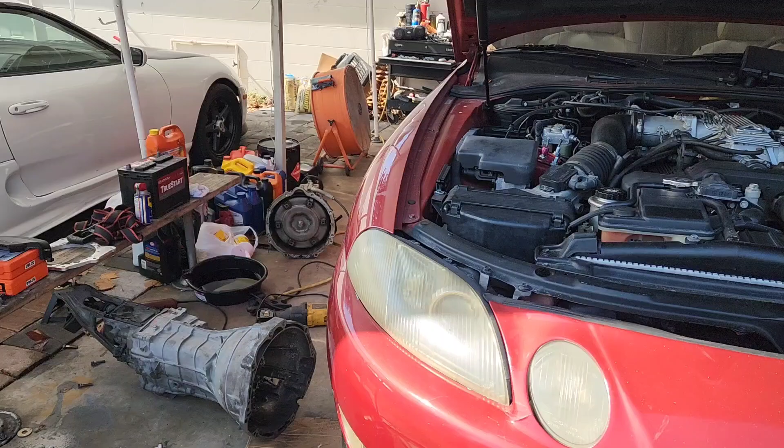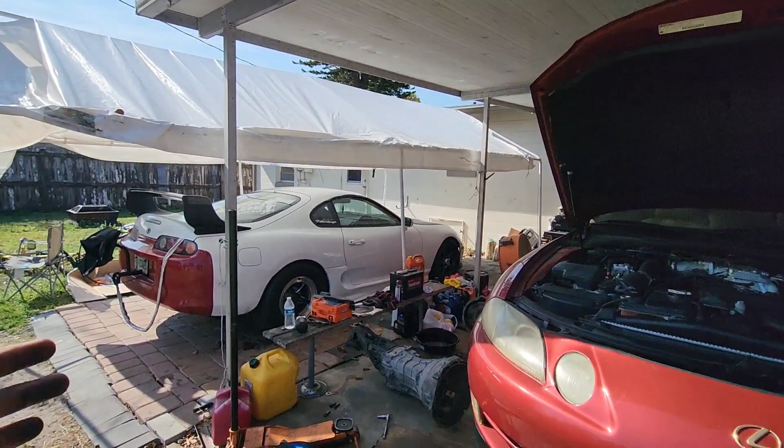Today we got a 1UZ SC400 that we're gonna do a manual swap. Now my brother already started, took down the old automatic transmission, and we're gonna put this CD009. The kit is from Automotive Sports Engineer, something like that, and it's gonna be a CD009 6-speed

into this 1UZ. First thing you gotta do is you gotta cut the bell housing on that third line.

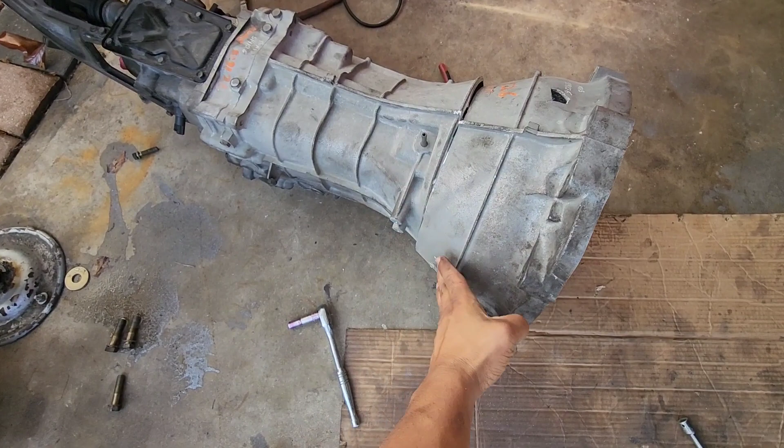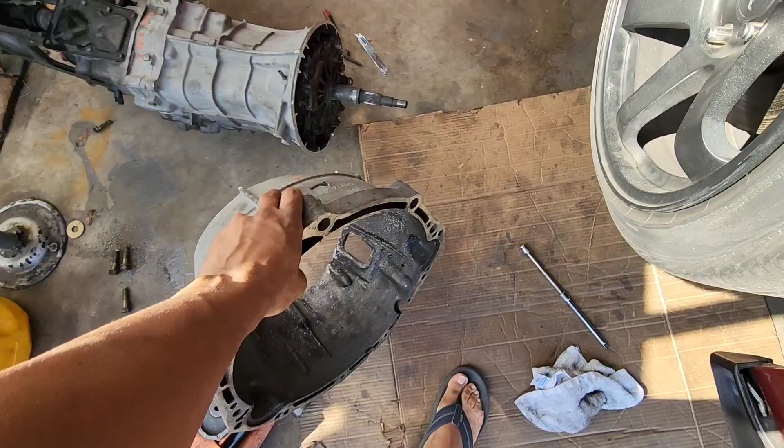But since we're top secret and we have this sharp hand, we just grab it right there and we go like this, yeah! And you see how we just cut it? We just hit it with the hand and we just cut it straight. I learned that with many years of practice. Takes a lot of bell housings. I cracked them here. My brother tried it and he broke the bell housing as soon as he hit it. But like I said, he's learning. But I hit it perfect and I just cut it and it comes right off. Okay, so look, I have no damage to the hand whatsoever.

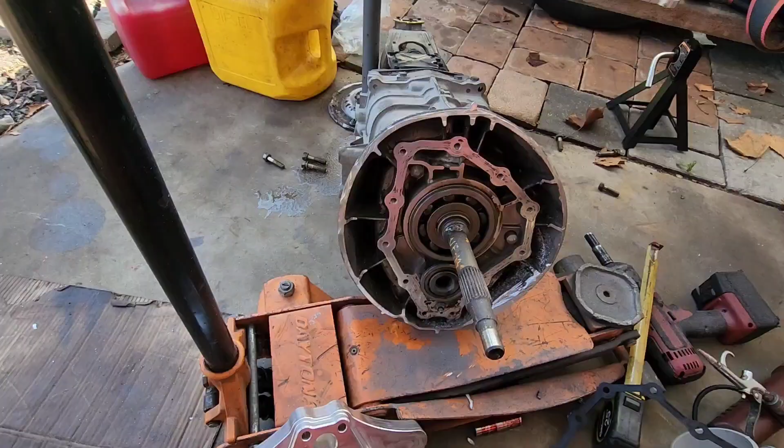So now the next thing we're gonna do is we're gonna take this plate out and then we're gonna put the adapter plate here. Then we're gonna use that bell housing over there and we're gonna put it here. All right, so we removed the old front cover plate. This is the gasket. We cleaned it, right? We also cleaned all the surface around with brake cleaner, and gotta put Loctite on these 4 bottom bolts.

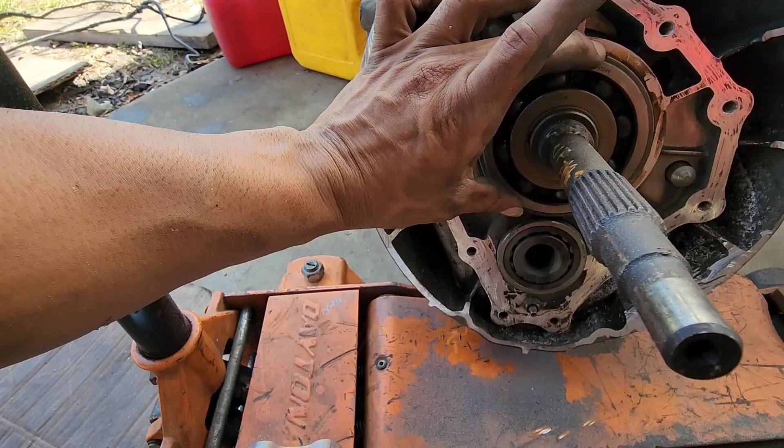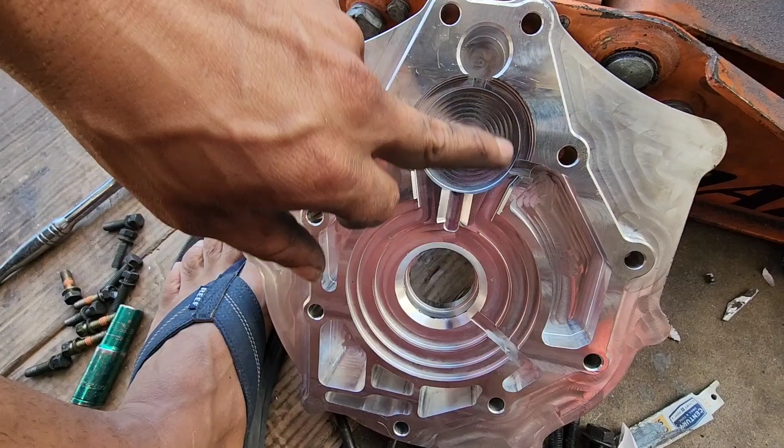Also take the measurement of this ring. Make sure it's 100 millimeters. This thing comes with a sticker in the front, which we peeled right there. Tells you if it's smaller to call them. But we took the measurement and everything is within spec. So now we're just gonna put a little bit of silicone around, real thin.

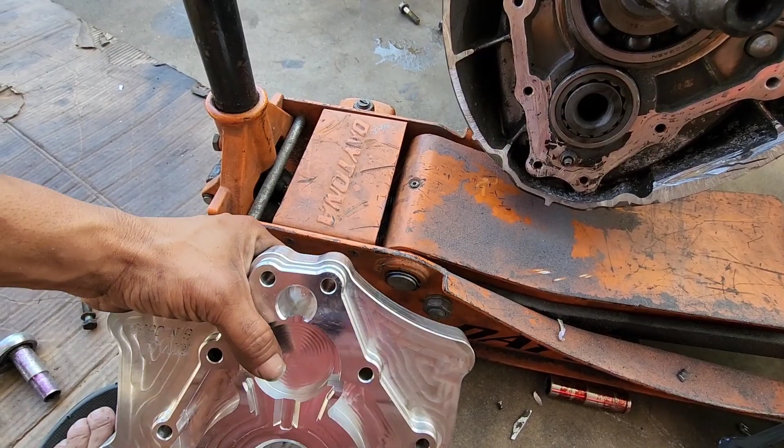Put back the stock gasket, put a little bit of Loctite on these 4 bolts, and we're gonna torque these bolts, which is pretty cool because the plate tells you right here the plate gets torqued at 30 and the bell housing gets torqued at 40 pound-feet. So let's do it. So this is the gasket. I already put silicone on the inside and I put some silicone around the plate and I'm about to put it there. The kit comes with all the hardware, right?

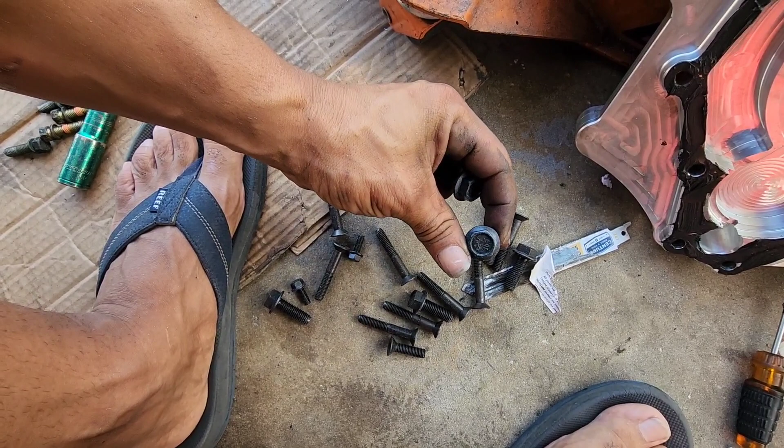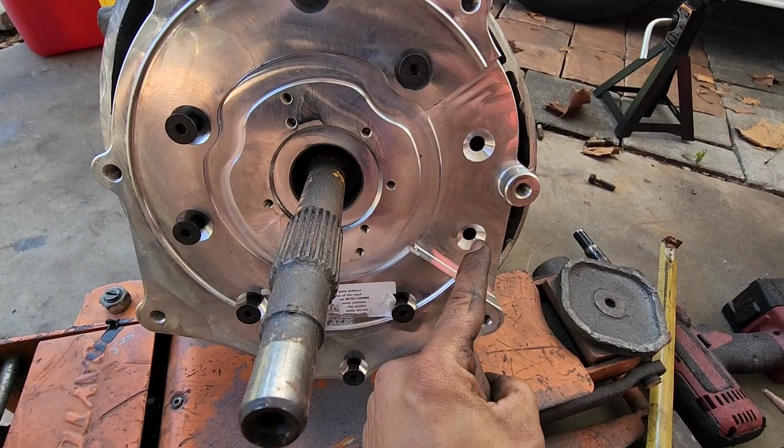The ones that are like this are for the bell housing, and these other ones right here are for the plate. There are some longer and some shorter, and I'll show you shortly where the short ones and the long ones go. So all these ones right here are long, and these 2 are for these ones right here. And then this is the last one, that's 30. So all have been torqued to 30, and the way we did it is we kind of crisscrossed everything, and they have been torqued to 30 pound-feet.

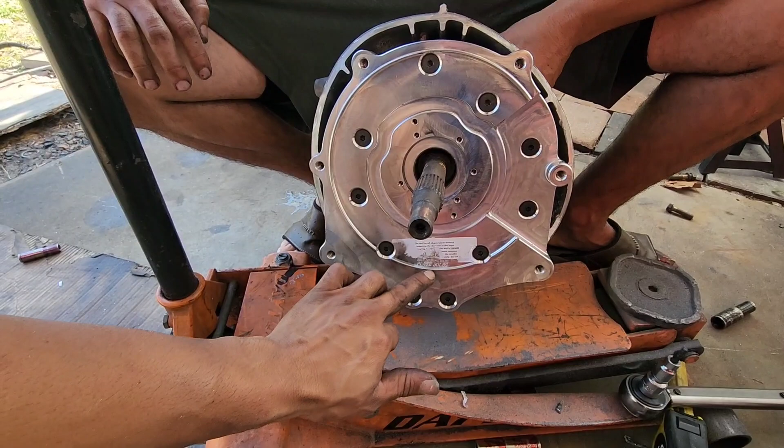So now we're gonna take that bell housing off from there, put it in here with these bolts right here. These 2 little ones are for the slave cylinder that we're gonna be putting last. So this ring that it's got here, that's where this sits. So it basically centers it. You'll see now. And then this gap that's here, that's where the lines come out, one for the feed and

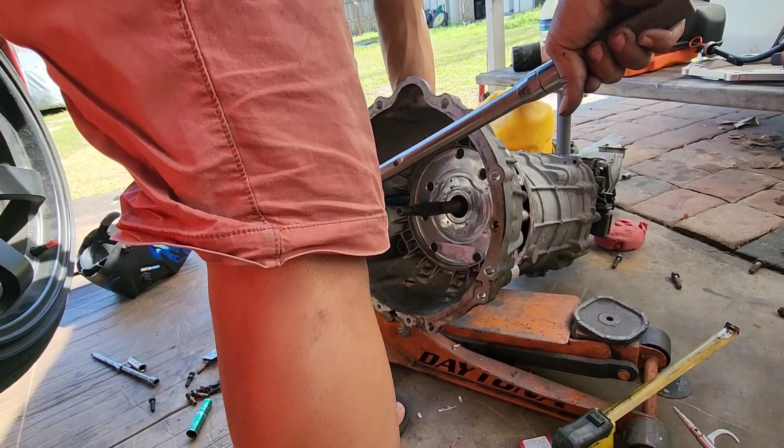one for the bleeder. The 2 long ones go in the bottom, and all the shorter ones, all 4, go on the top. So this one goes to 40 pound-feet. That's it.

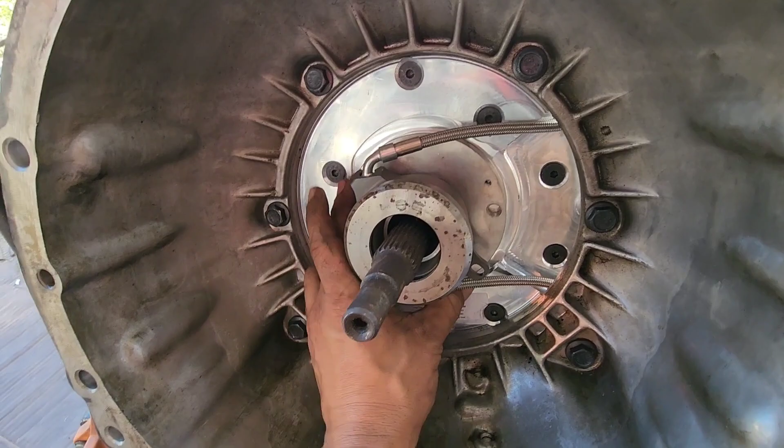So we put the slave in. This is a Tilton. The way this one works, you have to shim it, right? So since it's already put in there, you can spin it with this. So just spin the inside, and it's got some grooves, and it just pulls it in and out. So I can't find my caliper. My brother went to buy a new caliper. That way we can shim this.

So this is the old seal. That's the new seal. Always change that seal, because why not?

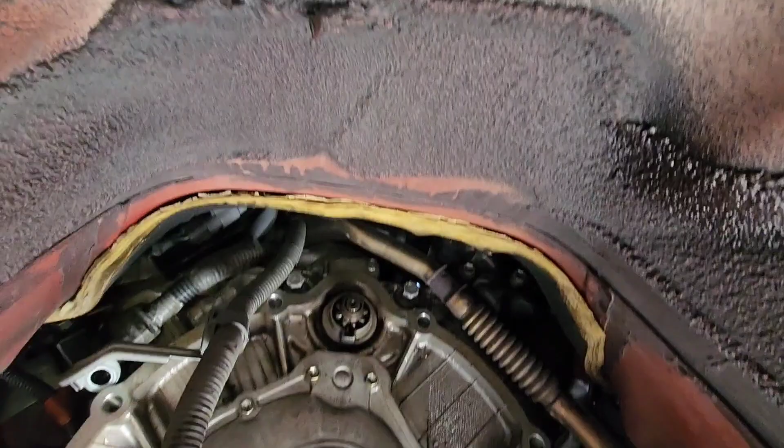And this is why I hate this. That freaking starter. That's why I hate this one, you see. Only because of the starter. If the starter wasn't there, I wouldn't mind. But bro, to change that starter, you take out so much stuff, that I would rather just sell the car if I have to change the starter.

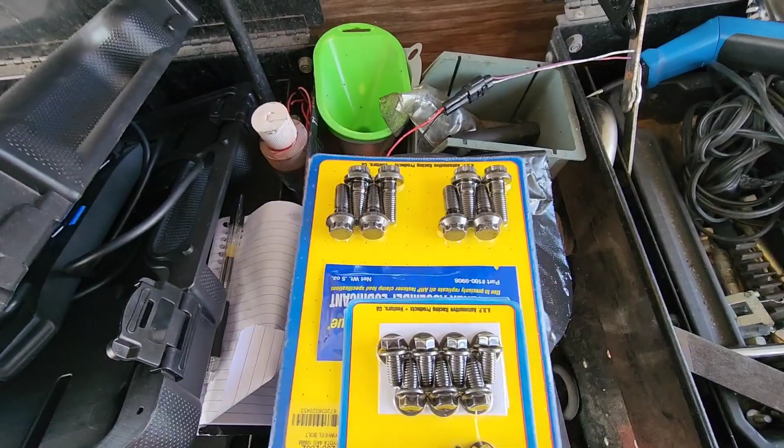It's got the flywheel bolts here, these ARPs, right? And then these other ones are for the pressure plate to the actual flywheel. So it's a pretty common process.

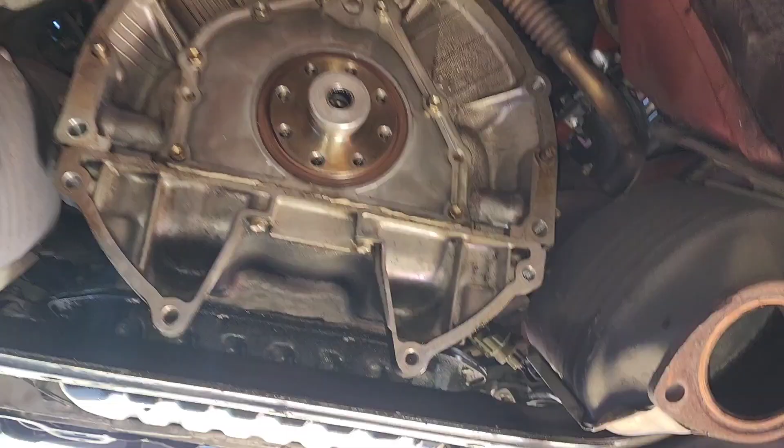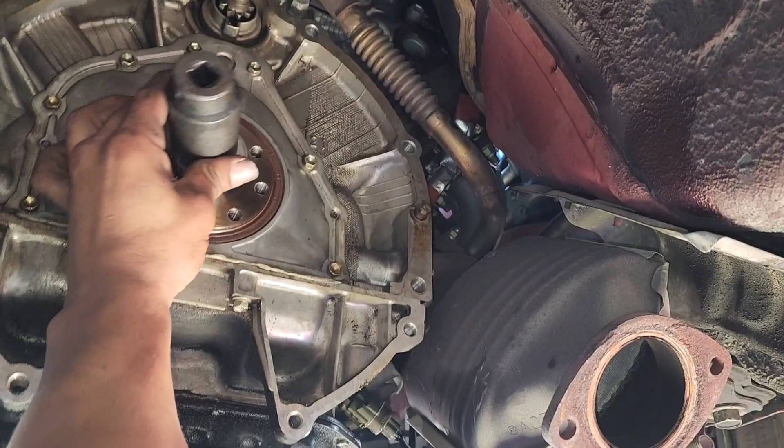When you put this in, please don't hit this with a hammer. Get a socket, something big enough like that, and then put it in like that, because if you hit it, you're gonna damage this bearing that's here. Get a big socket and hit it until you hear the sound change, going from hollow to real solid, okay? And it's all the way in.

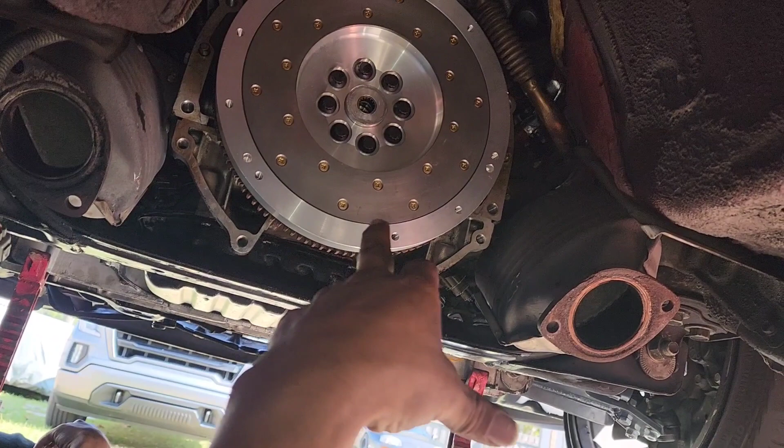So we just pulled it in. We torqued this to 80 pound-feet. We did 40 crisscross, and then we did 80 crisscross, and this is good right now. So now we're gonna bring the pressure plate along with the alignment tool and bolt it in there. Oh, and remember also put Loctite, red Loctite here, so this doesn't come out. We have ours right there.

So we put in the clutch, flywheel. It's already installed. We put the clutch disc in with the springs towards the tranny, and now we have to bolt up the pressure plate. Don't forget to put these pins in here. Comes with a little Loctite thread lock. Oh, nice. And then you put them in with the fat part in, the thin part out, and that's how you align your clutch. And this is how everything looks once it's torqued down.

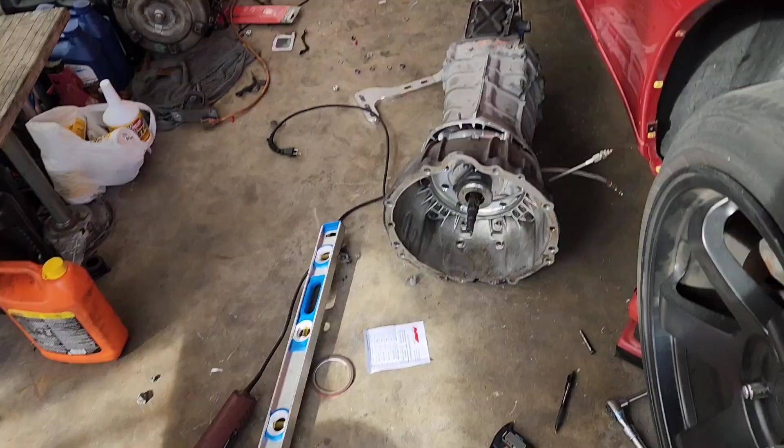Beautiful. All right, so we did a little bit of progress. What I did is I cut this right here. I cut this too right here, right? Because I want to make sure it doesn't touch over there. I cut this part here too. I'm gonna make sure it doesn't touch over there.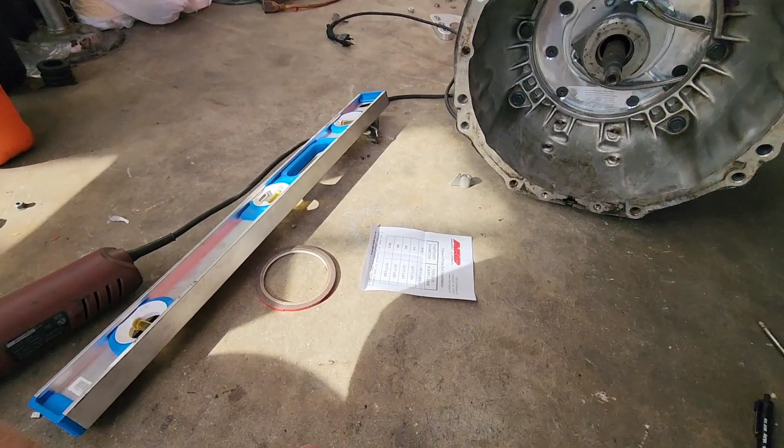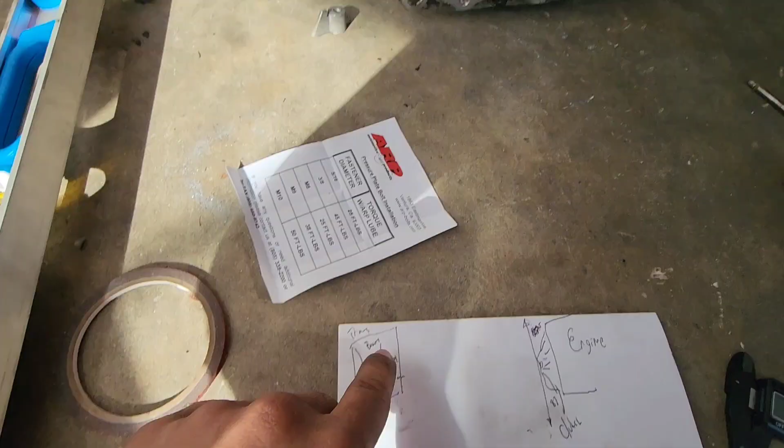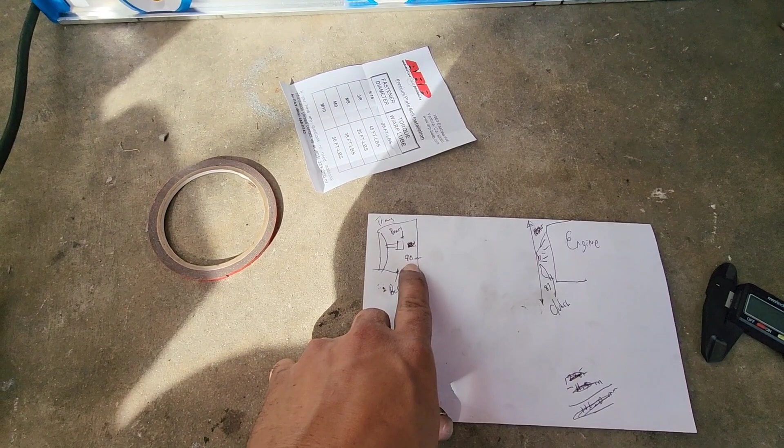Now over here in the front, what I did is I shimmed it, because this T56 slave, you can pull this forward and backwards, like towards the engine or towards the transmission. So don't make fun of my little drawings, right? But these are my drawings. So this is a bell housing, this is the slave, which is this right here, right? And what I did is I put this in here, zeroed the caliper in here, so I don't add this part here, and I got the measurement from this edge to here. That gave me 90 millimeters, right? This is what I got going on right now. This is after I've shimmed it, okay?

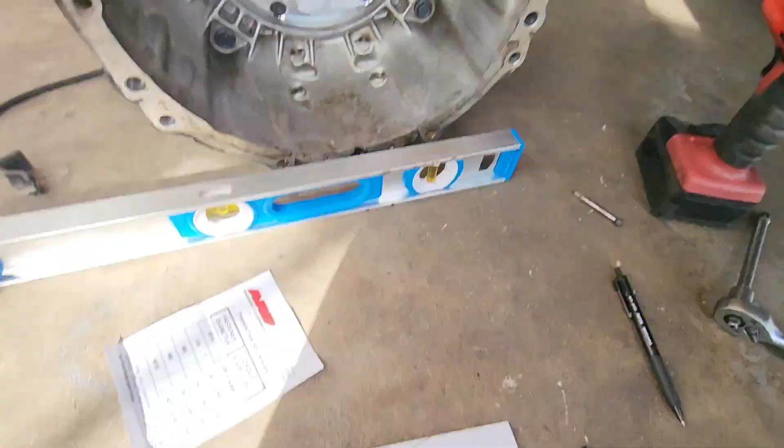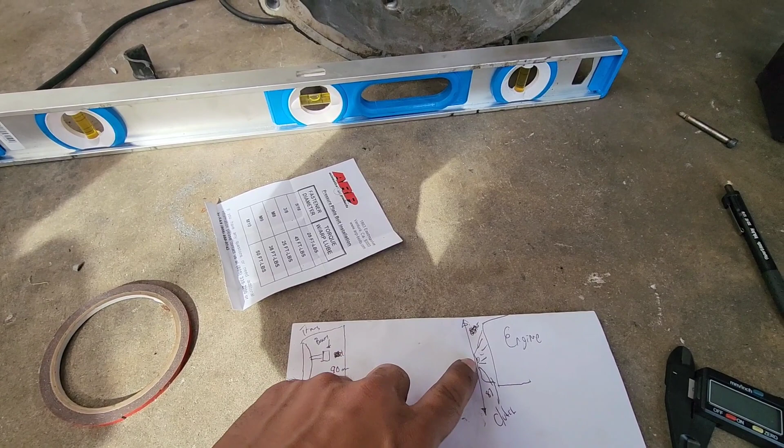What you want to do first is get the measurement over there. So this is the engine block right here. This is where the bell housing sits. This is the clutch. And you need the measurement where this bearing sits on the clutch. So you get that measurement from where it sits on the clutch, from here, to where the bell housing sits. So the same thing here, but where the clutch sits, right? That gave me 87. So that was my starting number, 87.

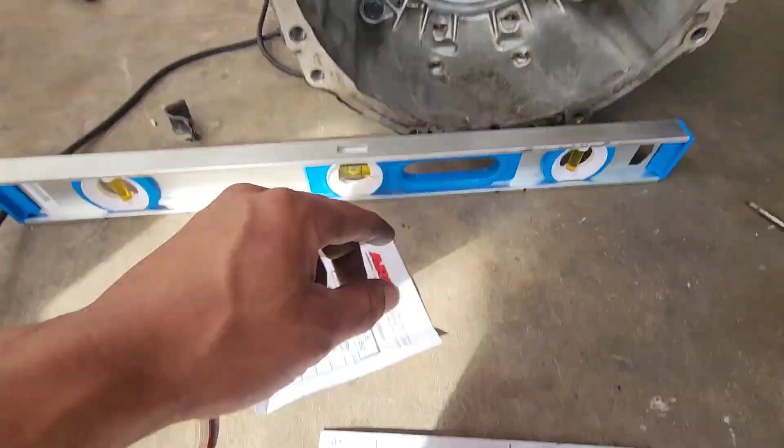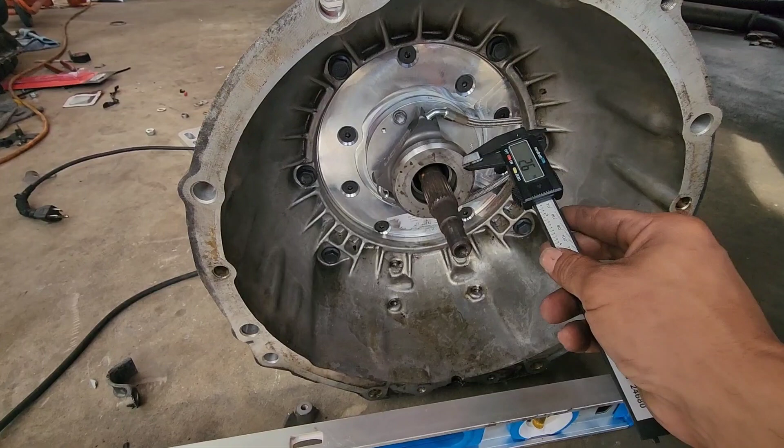So I wanted to do 3 millimeters of clearance. So I came over here, I got the measurement, and I moved the back all the way to 90 millimeters. That gave me a 3 millimeter clearance or air gap, which is roughly about that much of clearance. So when I put this in there, there's gonna be that much clearance. That way it gives me the most effective range for this slave. Okay, and that's how I shimmed it.

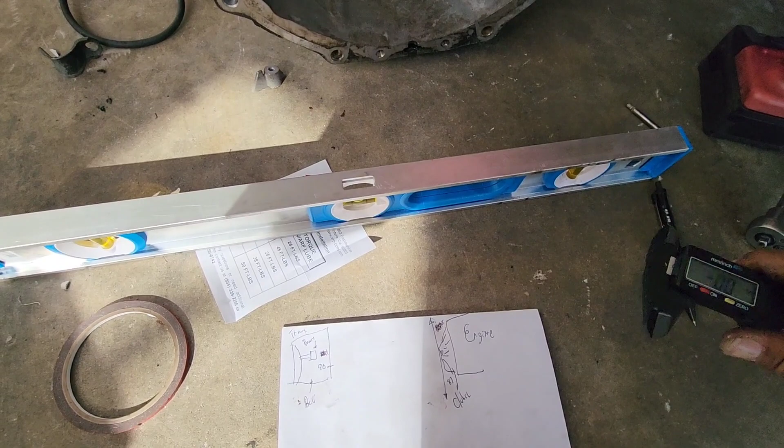But remember, if you use something flat, make sure you don't add this number. So basically you open it up, you put it there, and you zero, and then you can start your measurement, because now it won't add this. It's just from there it starts adding numbers. That way your numbers are not off.

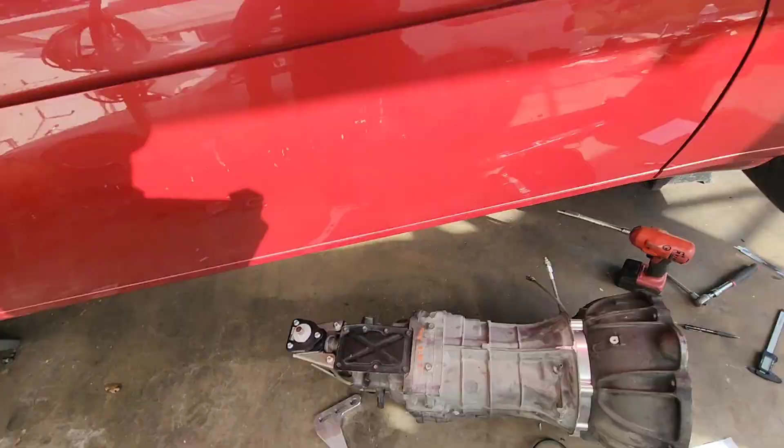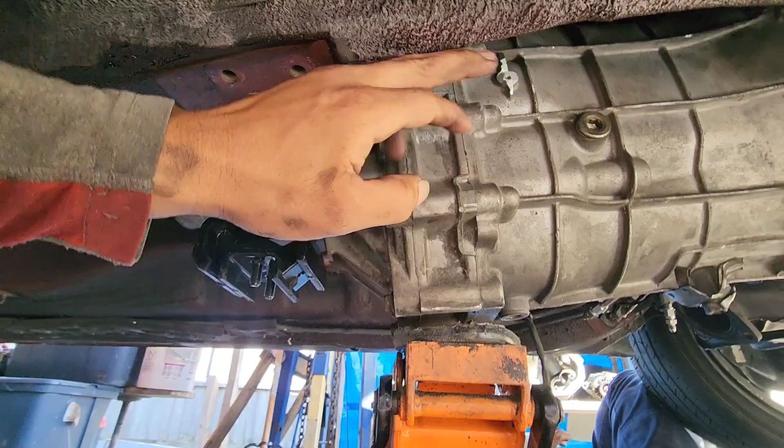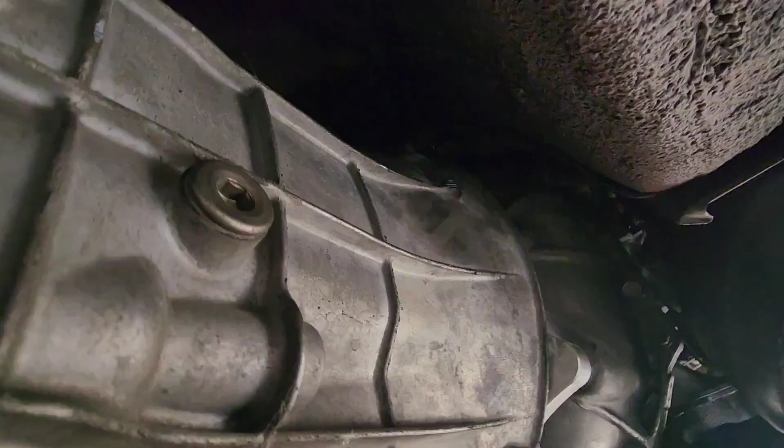So the transmission is in, all right? Some places we massaged, probably like 2 inches to the front. Right here, we massaged that part of the tunnel and this part as well. Plus the parts that we cut. Were they necessary to cut? Maybe not. But nonetheless, it's cheap reassurance. You got the brother there, and it was actually pretty easy to put in there. There's plenty of room to work with. I'm surprised.

All right, so everything's been installed. We got the lines there that we have to connect to the clutch. Now the transmission mount that this kit came with, right?

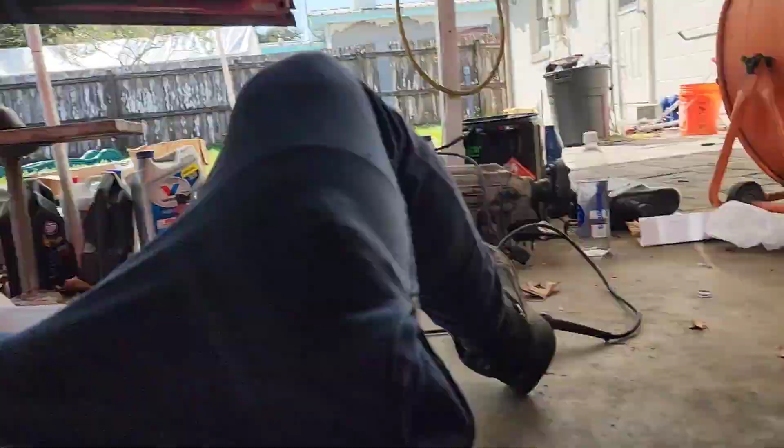Oh shit! Oh shit! I peed myself. No, that's this guy spilled his beer.

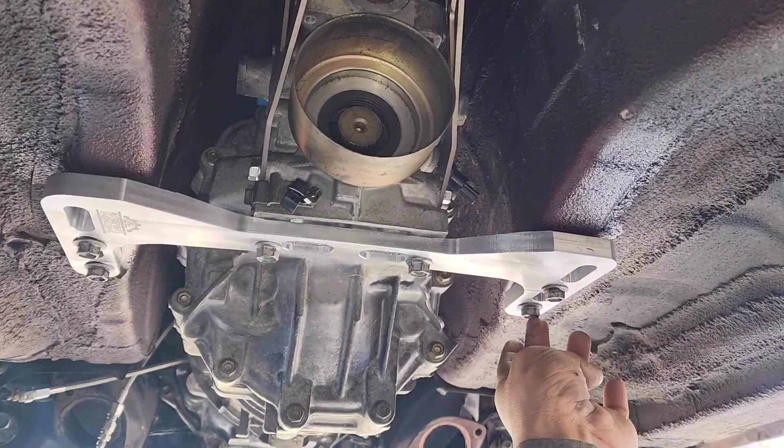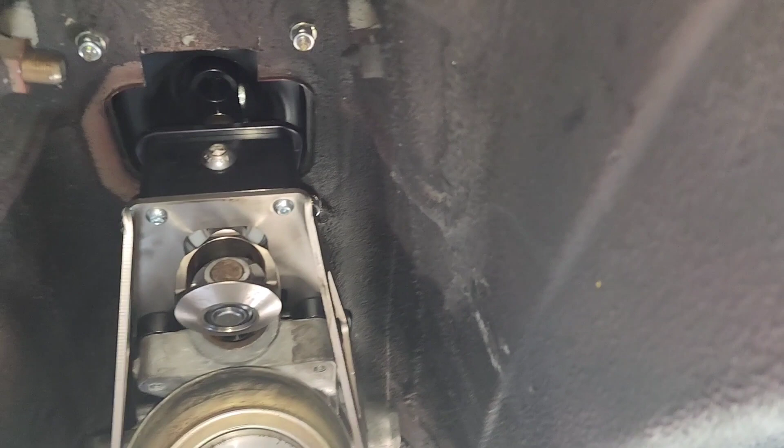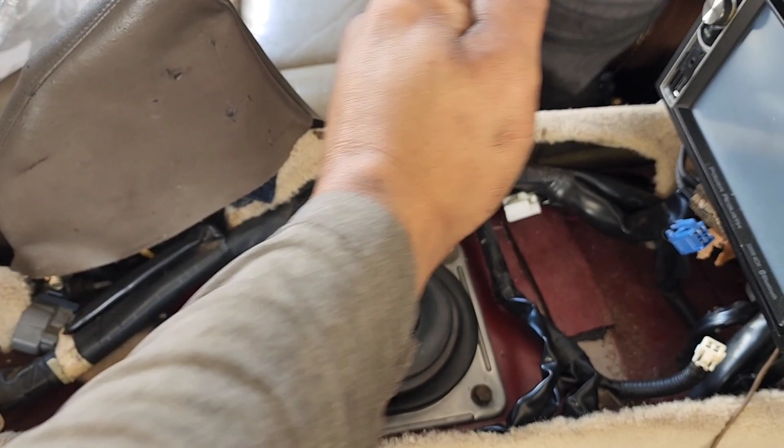But this is how everything looks, the bottom. All right, and let's go to the top, and this is on the top. Beautiful. Look at that, 5th and 6th. So now he's doing the...